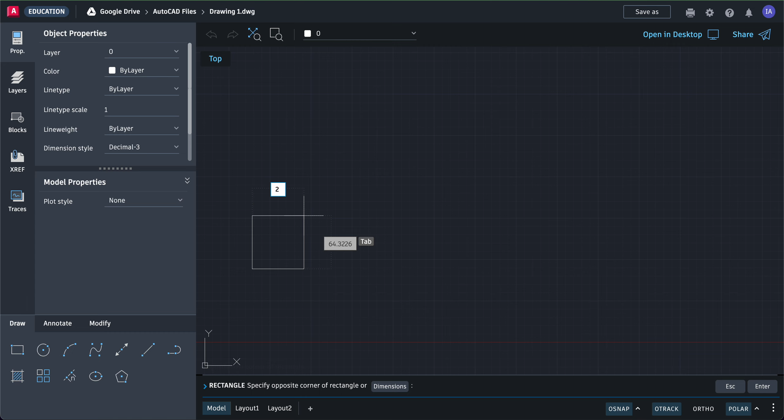Okay, so we just learned how to make a rectangle, and this is a rectangle here. So if you click that, let's say I wanted to make a rectangle that is 2 by 4, I click the start, I drag it up, and then I put in 2, press tab, and then I press 4, and then press enter.

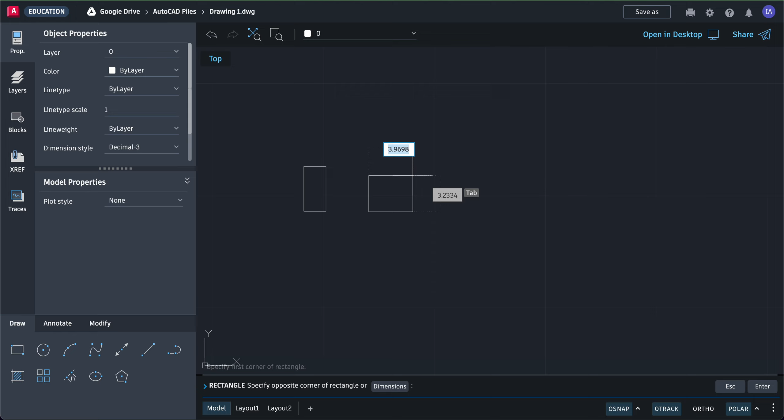Okay, and then you will see that it's a very small rectangle because that's the size of a 2 by 4. Okay, so if I want to make a square, then I also use a rectangle, and I click the start, and then I drag, and then I type in 2, press tab, and then 2, press enter. Okay, so again, that's width and length. So 2, press tab, 4, press enter. Here is 2, press tab, 2, press enter. So that's a 2 by 2.

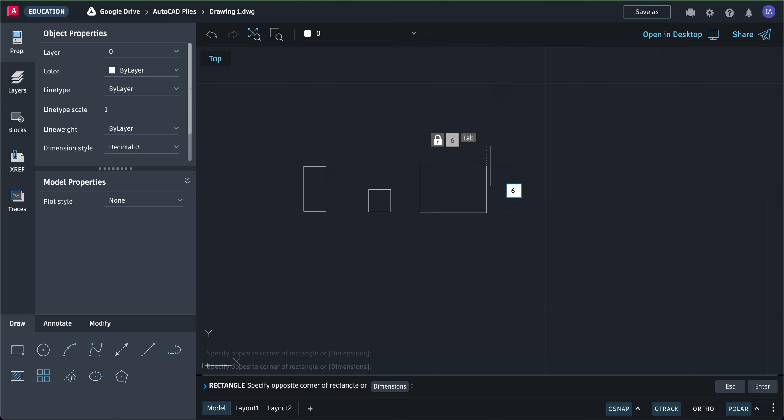So let's say you want to do a 6 by 6. It's a square. So simply click here, drag. The width is 6, press tab. The height is 6, press enter. All right, so that's a 2 by 2. This is a 2 by 4. That's a 6 by 6.

Okay, what if I want it to be a long one? Let's say I want it to be 2 by 10. So the width first, 2 by 10, the width first. So you're going to type in 10, press tab, 2, press enter. That's a 2 by 10. Oh, that's a 10 by 2.

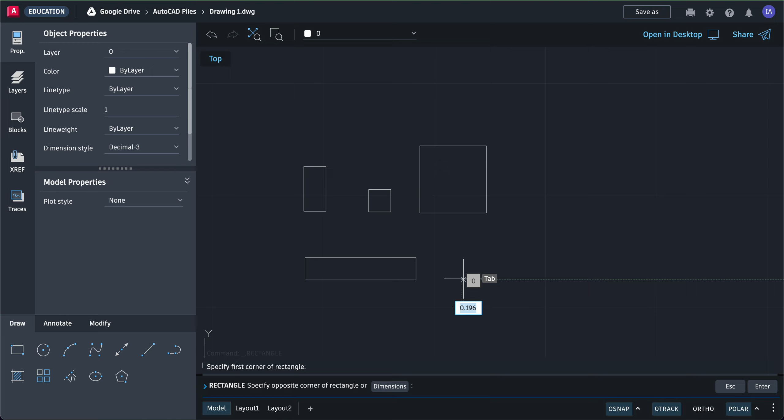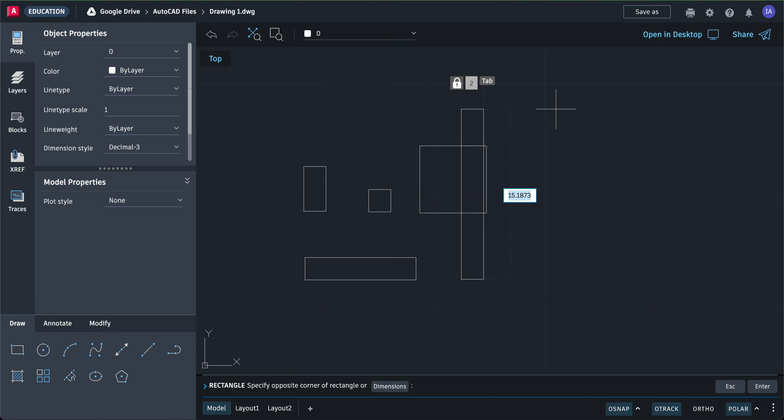Okay, so again, when you click a rectangle, when you drag it and move your mouse, you can see the top number is the one that's highlighted because that's the first number you're supposed to be putting in. So if I type in like 2, it's the top number that you're putting in. If you press tab, that's already 2, and then all you're doing is dragging it up, and then type in the next number, 10, press enter. That's a 2 by 10.

This one is a 10 by 2. I messed up with that one probably. So I can just move this and up. I can, if I want to move this, I select this move tool, select this object, press check mark, and then move it. What happened? Undo, okay, undo here.

There you go. So move, and then select. Press check mark, click here, drag to the right, and then click again. Okay, so again, there's a lag, there's a delay, and that's normal with anything that you're working with the browser. Okay, we're gonna pan to the left or right.

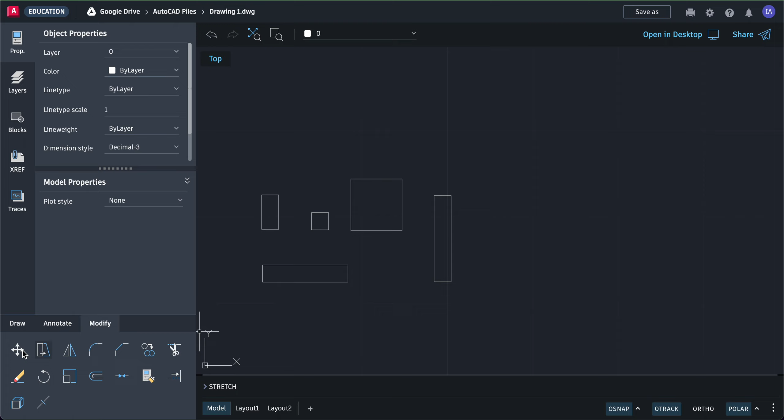So that's how to make squares and rectangles using the rectangle. What if I want to make a triangle? Well, there's different kinds of triangle. So if you want to make a right triangle, you can make it out of lines. So we're going to go to draw, and I can then click line. Line here, and then you can just click here, and then drag.

And then if you want the bottom of the triangle to be like 6, you type in 6, then you press enter. Okay, and then you can drag again, and you want the height to be 12, you put 12, press enter, and then you simply go back to the beginning. So that's a right triangle.

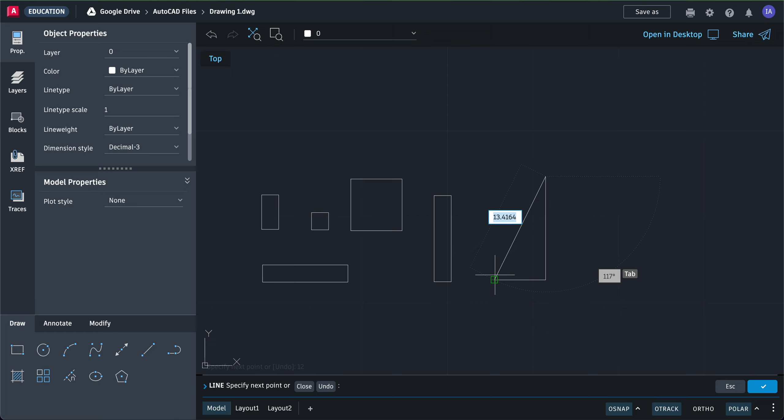Okay, what if I want the right triangle to be 5 in the bottom and 2 on top? So again, you can click line. I want to start at the top one, so click the start. Now this time I'm going to drag down, and I want it to be 2. Press enter.

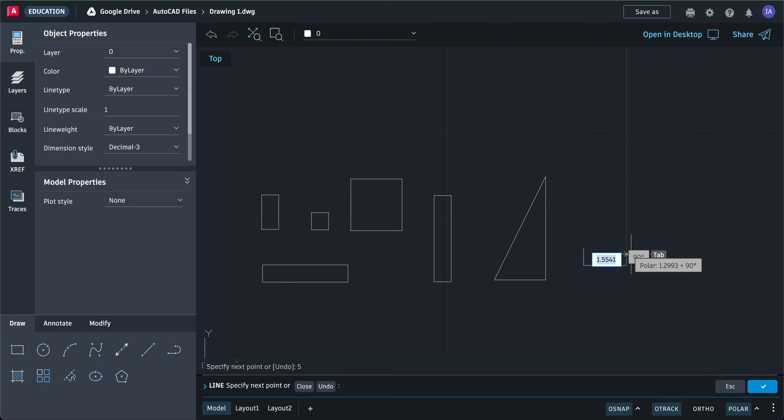And I want the bottom to be 5, so drag to the right, and then 5, press enter, and then go back to the top. Okay, so that's how to make right triangles.

What about if you want to make an equilateral triangle? Equilateral, if you learned it from math, all the sides are the same, and that can be done using this polygon tool. So when you click polygon, the first thing it's going to ask you is how many sides you want. So since you want a triangle, you type in 3, and then you press enter.

Okay, and then you click the center, and then you drag. You first answer whether you want to inscribe or circumscribe. Let's talk about inscribe or circumscribe later. Just press enter first for inscribe, and then there you go. Okay, and then simply drag to make equilateral triangles. Okay, now

inscribe and circumscribe. Inscribe means that the triangle can be created using the center to the corner. So that's inscribe. And then circumscribe is defining the triangle from the center to the side. Okay, because a triangle can be done in 2 ways.

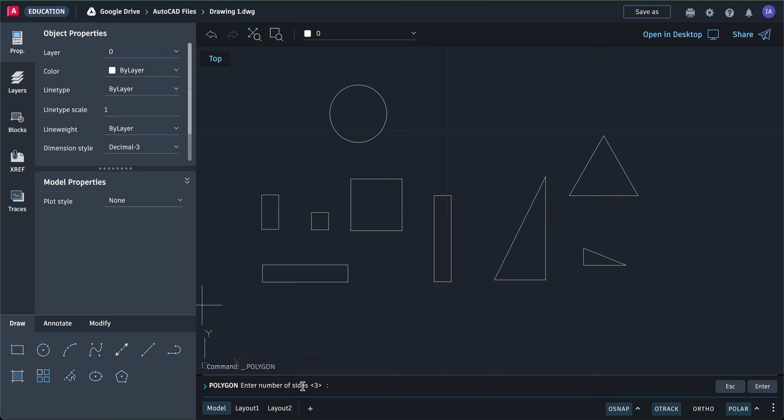Either you define a triangle from a circle, and then you get your triangle, number of sides is 3, press enter, and if you click your center here, you can do your triangle using inscribe. If I type in I or press enter, then you can define a triangle by making a triangle inside the circle. So that's called inscribe, because you want to define it using the circle.

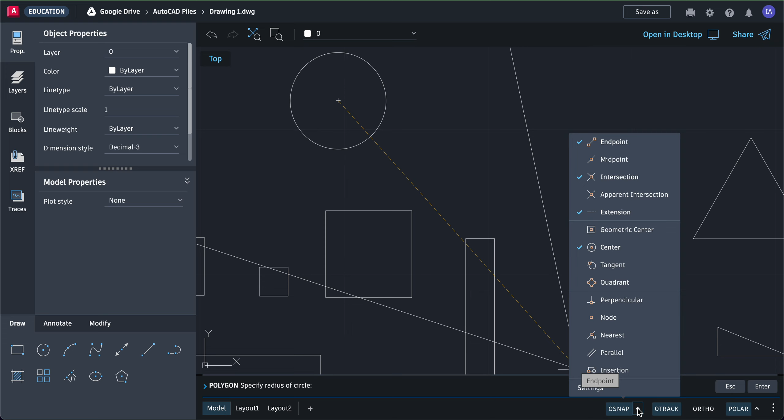So if you want your triangle to touch here on the circle, you're going to click the OSNAP tool and make sure that NE, nearest, is on. So if I click nearest, you're now able to select the circle, and that will be exactly on that circle.

Okay, so if you draw a circle, any size right now, and you want the triangle to be defined by the edge, you click polygon, number of sides is 3, enter, and then you want to pick the center. Okay, and then when it comes to inscribe or circumscribe, you have to type in letter C, press enter. Okay, and now you are defining this triangle using the side of the triangle. So now you can click on the nearest, and that's the difference between inscribe and circumscribe.

Okay, so this lesson is about making rectangles with exact sizes. This one is making right triangles with exact sizes. And if you want to make a triangle that is equilateral, you have to know the size of the circle first before you can make that triangle. Okay, because you can make the right triangle or the equilateral triangle inside the circle or outside the circle.

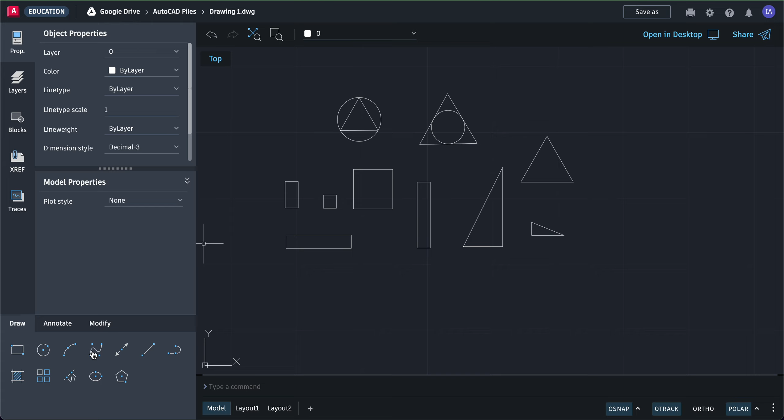Okay, so if you want to make a circle with a definite size, you click circle, and then you click here. And you can define it by the radius. Okay, so the radius of the circle, I want it to be 4, so type 4, press enter. Okay, and that is exactly 4.

So if you want to make a triangle, you can define a triangle by having the radius of that triangle, that means the center to the corner, to be the same here. Or if you want to define the equilateral triangle by the mid side, then it will be called circumscribe. Okay, so again, exact measurements: circle with a radius of 2, click the point, drag, type 2, press enter. That's a radius of 2.

Okay, what if I want a diameter? Well, you can also do diameter: circle, click the center, and then the option here is either you type in the radius or you type in D or click D. Now you're defining the diameter. So the diameter is 4, the radius is 2. So if I type in 4, the radius is 2, just like that first one.

Okay, so this lesson was about drawing shapes: rectangles, squares, triangles, and circles. Okay, so let's save this as, and just save it as shape 1. So we're going to change this to shape 1.

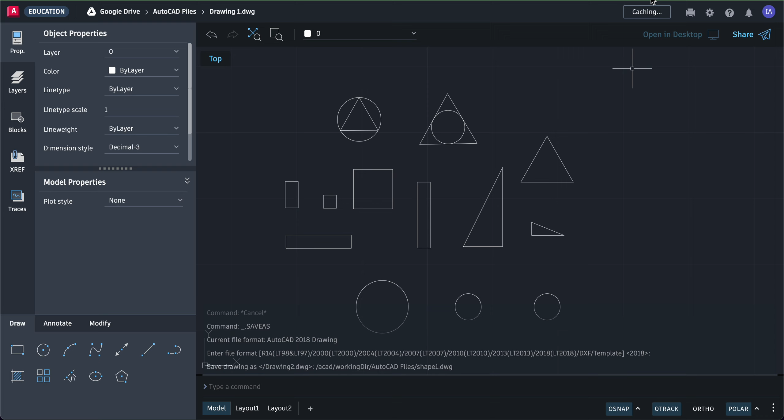When you click save, you have to wait until caching is finished, saving is finished, and you only know it's finished when you're back to the save button. Okay, so do not close your Chromebook when this one is not yet back to the save button. Okay, so let's do that.